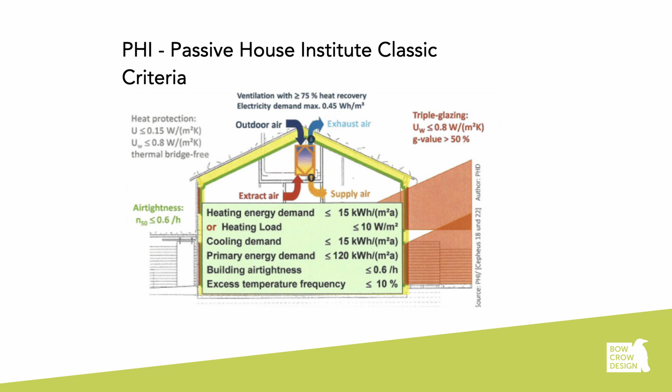So this is what it takes to certify to a PH standard. With PHI, the Passive House Institute, we've seen this slide already. We have certain goals to meet, and they're hard and fast. In order to do a classic certification, it's 15 kilowatt hours per meter squared, or a heating load of 10 watts per meter squared. The cooling demand needs to be reasonable, the primary energy demand needs to be under 120, and the air tightness at 0.6. These are all a really big deal.

In order to get to the certification level: the definition of heating demand is the energy used annually based on the passive house method for calculating floor area and volume, which is not the same way you would normally calculate floor area and volume. The heating load for a passive house is the maximum heating power necessary to keep the internal temperature at 20 degrees Celsius, 24/7, during the winter.

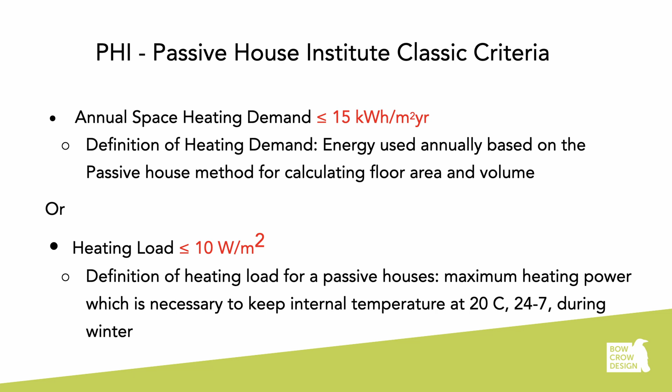The primary energy demand is the total energy to be used for all the domestic applications—all the base loads, all the heating, as well as the hot water, and the building air tightness needs to be 0.6 ACH. Getting to 0.6 seems kind of crazy.

I think the standard for building code in Canada is around 2.5 for a very good building, and probably most older buildings are at 4 or 5. So 0.6 is a very airtight building, and when you're doing that you do have to consider ventilation—it's an important aspect. But when doing an airtight building, getting to 0.6 is the first hurdle; many people who practice this get buildings to 0.1 or 0.3 pretty easily.

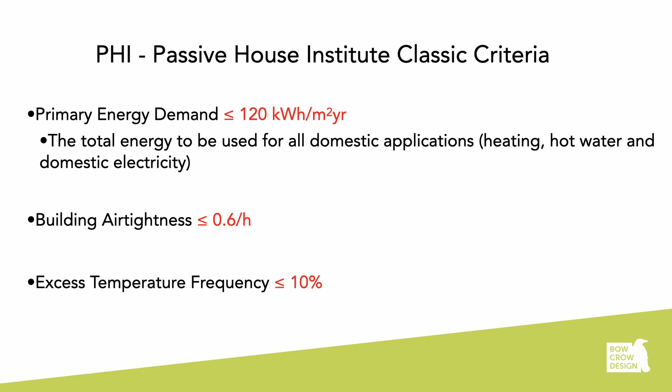We use the Passive House Planning Package, the PHPP, for determining whether a building will meet the criteria for certification. It's really a big spreadsheet with many pages intermingled with each other that help determine whether the building is meeting the criteria.

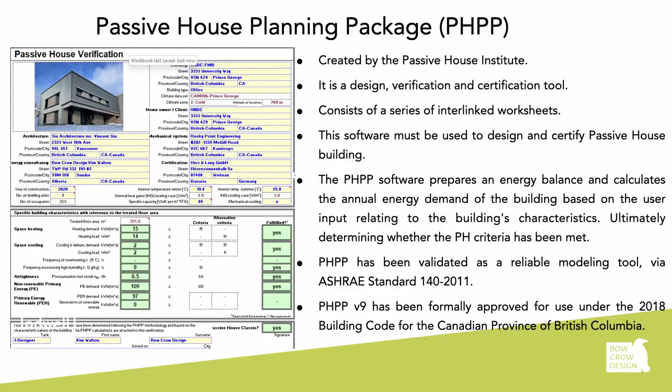This page we're looking at is the verification page. You use the software and move parts around, playing with different aspects of the building to see whether you're making the grade, and everything gets calculated on this front page. We also use another software tied into the PHPP called Design PH, which is a plugin using SketchUp that feeds into the PHPP.

This is a really good and fast way to figure out whether a building is close to being certifiable. We use this sometimes for a building that isn't being certified, just so we know if we're getting close to a certification level.

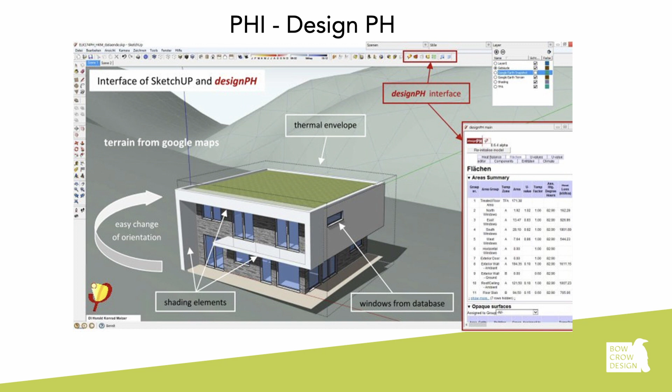The process for certification: the very first thing you need to do is find a certifier and somebody who's going to help you design your building to a certified level. In the design stage review, it's important that those people are involved in all the decision making and all aspects of the design. Otherwise, it's very difficult to get to a certification level.

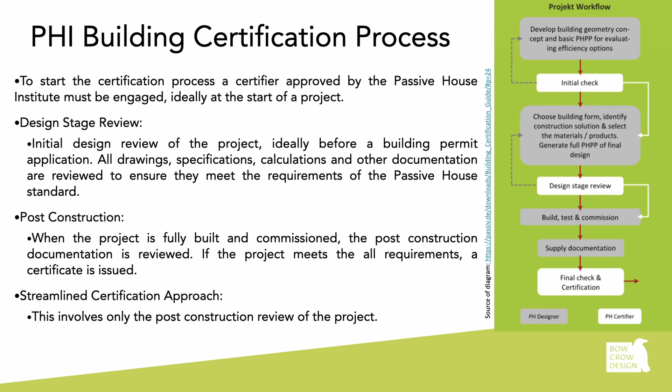Then after construction, when the project's fully built and commissioned, the evidence for all of the work—usually photographs and documentation—is reviewed by PHI in order to get the project certified.

So I'm going to talk about a couple of projects that I've been the certification expert for, or have worked on, that have become certified.

This is in the town of Valemount, which is west of Jasper, in BC, in Zone 7A. It has 5,357 heating degree days. Just incidentally, Winnipeg is about 6,000 heating degree days, so Winnipeg is colder.

But this is in the mountains, and it does have a lot of shading because of the mountains and this location. The architect for this project was Vincent Sin, and the builder was Eric Olofsson Construction.

The plan was to use the Larson truss approach, and I'm so glad we had so many nice photos of Larson trusses. The building was surrounded with insulation, and the air tightness ended up being 0.39 or 0.4.

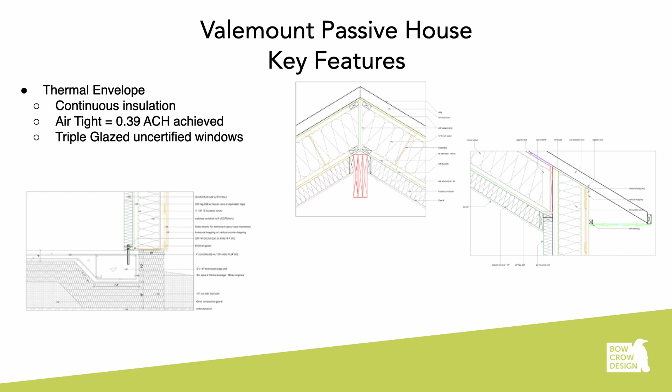We used triple glazed windows that were uncertified in this project, so to make that work we had to do some thermal bridge modeling and over-insulation of the windows. The walls and roof systems for this project were prefabricated by Collective Carpentry.

There's a great picture here showing how, because it's a vaulted ceiling, the ridge beam has been prepped for being air sealed up against the roof deck.

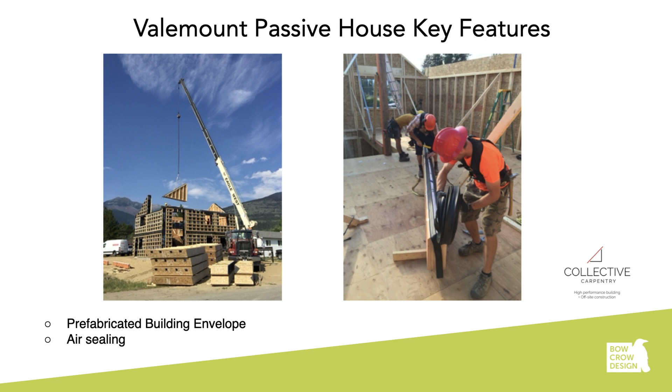We used the Paul Novus—which I don't think exists anymore—and the Comfofond, which is a perimeter glycol loop for preheating the HRV.

We just used an electric tank for the domestic hot water, and this house does not have a heat pump. It's just electric resistance heating throughout.

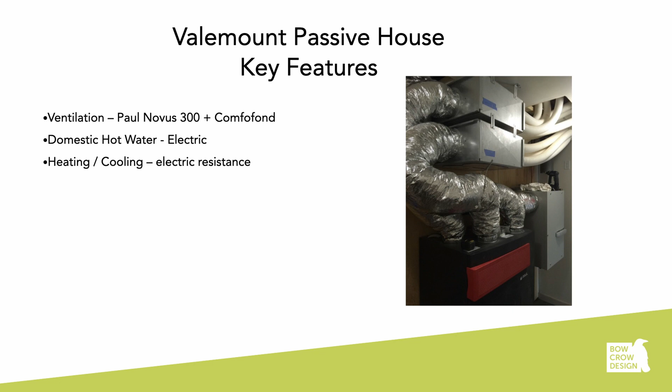When I was brought on, the design was mostly done, but when we ran it through the Passive House Planning Package, we realized we needed a little more solar gain, so we had to add a window on the south side.

Also, to achieve certification, we had to do thermal bridge modeling for all of the connections. You don't always have to do that, but we were just on the edge of certification, so we had to do an awful lot of thermal bridge modeling for this project.

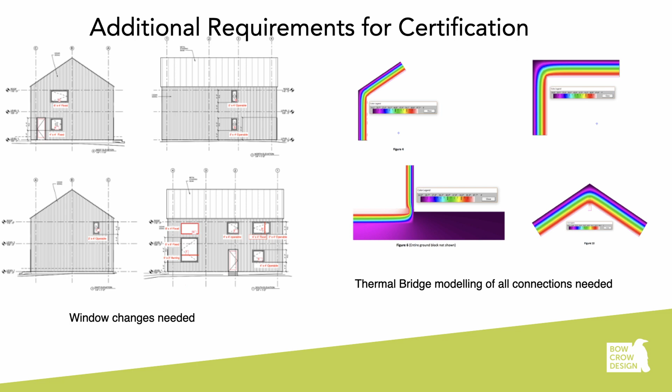But in the end, certification was achieved, and the owner of the building is really happy about the house and about living in it.

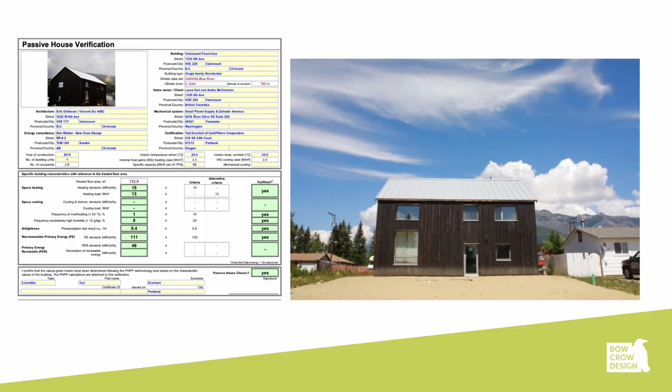His motivation for doing this was that he was the mayor of Valemount at the time, and he wanted to set an example, hoping everybody else in the town would build passive house. That hasn't come to pass yet.

This next project is a small commercial building at UNBC.

It's a facilities management building, designed by Vincent Sin as architect, with Olofsson as the builder. This is at the University of Northern British Columbia in Prince George. The heating degree days still put it in a cold climate, though not as cold as Winnipeg, and it's a two-story office building.

There were some interesting parts of this project, one being the big cantilever used for the second floor. There were a lot of requirements from the owners at UNBC for what they needed, but they were determined to have a passive house building, since UNBC has set a standard for all their new buildings to be passive house certified.

So we used a couple of ComfoAir ERVs for this project, and they are certified for cool climates. It's a cold climate, so using cool climate components means we probably have to do something else to make the building work, since we're not using true cold climate products.

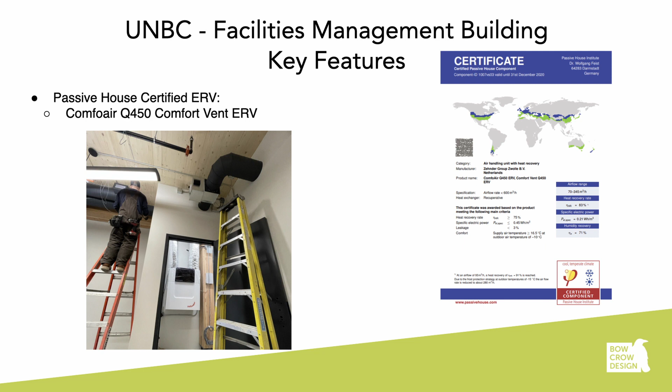Cold climate products, there aren't a lot of them. The reason is there isn't a lot of demand for them. There are a lot of people living in climates that are cool or moderate, and people living in cold climates aren't requiring enough products to make it viable to deliver really good performing products for cold climates. So we end up using cool climate products often.

In this case, we also had windows that were not certified for cold climates, so we had to do a bunch of over-insulation and a lot of thermal bridge modeling in order to use those windows and prove that they worked.

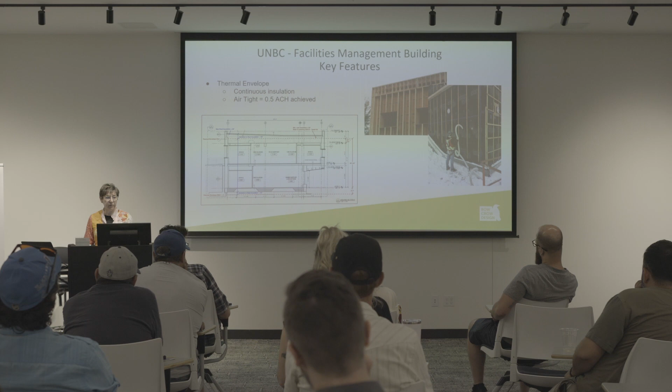This is a really simple shape, a box with a great building envelope, which helps a lot with the project. We had some challenges, not only with the cantilever, where we dropped the framing underneath and filled it with insulation, but also with an existing retaining wall that needed some funky details. But we ended up with an airtightness of 0.5, which is great.

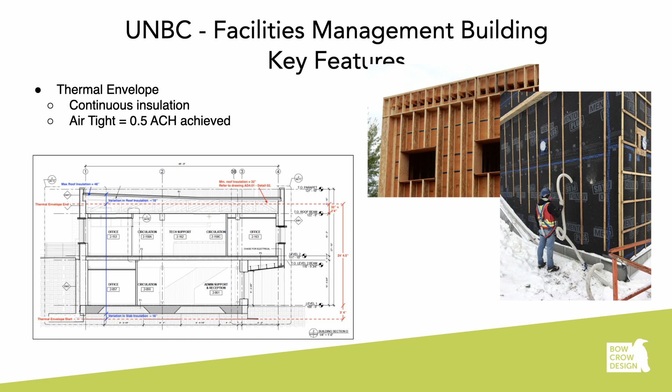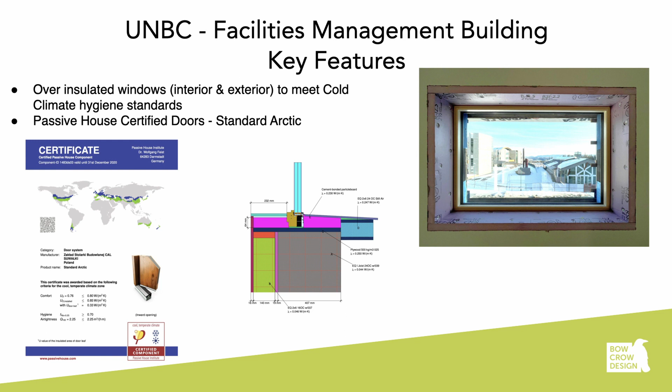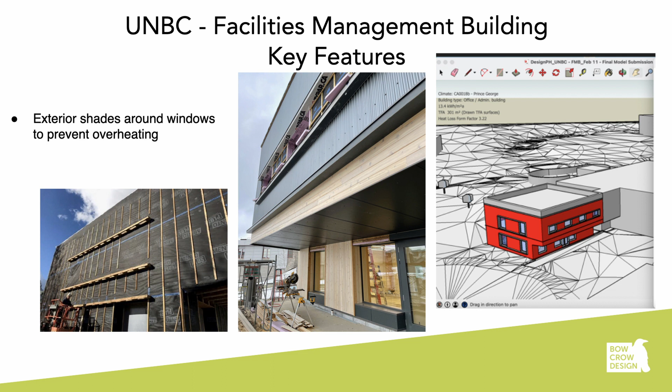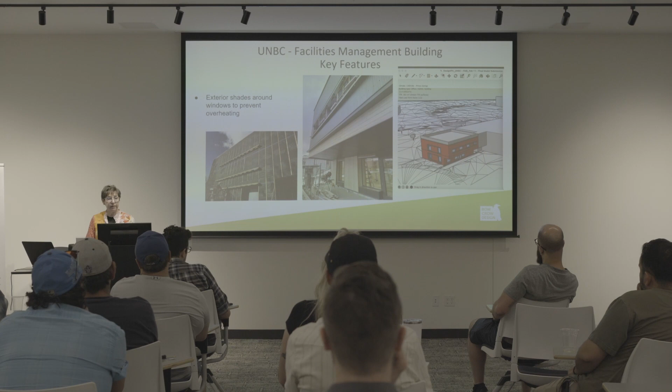Again, we used Design PH at the beginning of this project just to be sure we were on track before we got too far in, and that we were working through the details beforehand.

This project was certified through a certifier. The certifier we used for the first project was a North American certifier, and this one was with a German certifier. Those certifiers work independently of PHI - they are experts in this field, and they help the team understand where they should go with the project.

Okay, now I have about 5 minutes left, I bet.

PHIUS is the US version of PHI, using the same principles, but the PHIUS requirements are climate adjusted. So it's not a hard and fast 15 kilowatt hours per meter squared - it's adjusted for the climate. For this climate, it'll be around 30 kilowatt hours per meter squared, which seems like a lot more, but it's actually not that much different in terms of performance.

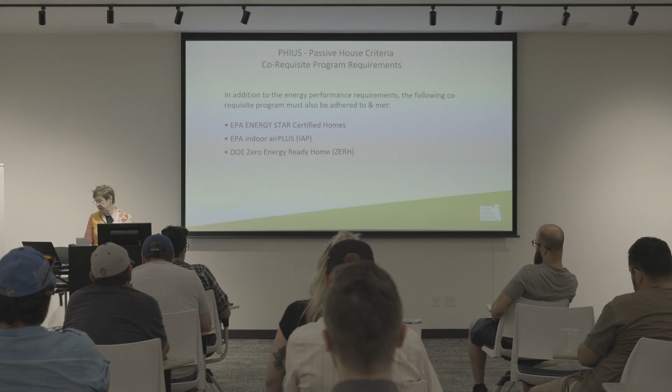The other thing about PHIUS is it's based in the US, so it really depends on Energy Star for certification and the whole system for the DOE Zero Energy Ready Home program, which is established in the US - that makes it a little bit more difficult in Canada for sure.

In this case, what we do is use software called WUFI. WUFI is not the spreadsheet that PHI uses - it's a software developed for hygrothermal performance of buildings, and it has a portal. There's specialized software for doing the PHIUS certification, and once you get through to a certified building, you're able to determine whether there's going to be some moisture or dew point issues, hygrothermal issues.

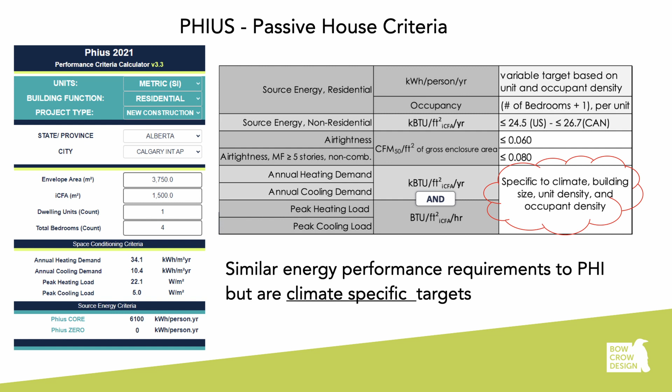We have to have Energy Star certified equipment, and that's turned into an issue because that's an American standard, and the equipment you want or need to use isn't necessarily certified. You'll take a hit in the efficiency PHIUS will accept if it's not certified. It requires all of these things as well.

In the radon mitigation, it does look at some other things that PHI does not look at.

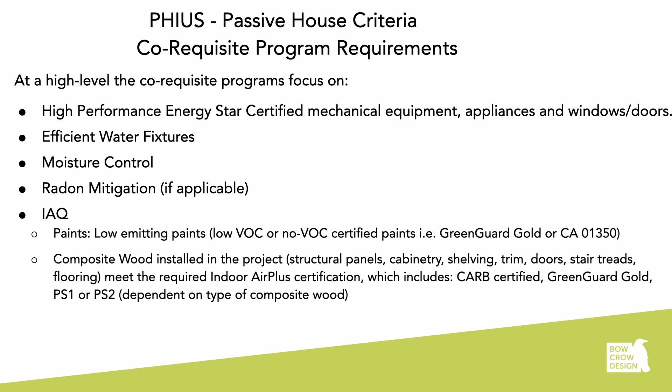This is why the software is called WUFI—is anybody German here who can read that? It's a funny name. It also uses a SketchUp program for doing the basic model, so it's got a plug-in. You can throw a SketchUp model or a Revit model into the software in order to determine the size, volume, and all those things about the building.

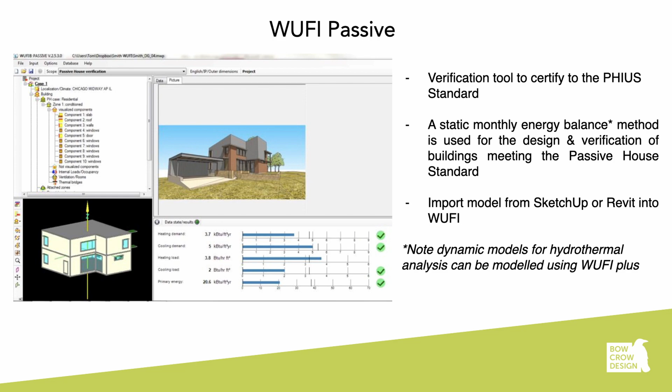So WUFI is kind of like Design PH plus PHPP. How's that for acronyms?

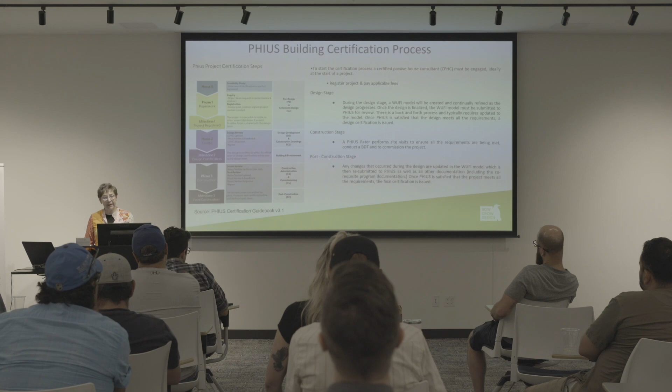Okay, the PHIUS certification process is a little different because the team that looks at the project at PHIUS is actually part of PHIUS, not a separate certifier.

But the parts that are the same: you have to engage a certified passive house designer or consultant at the very beginning, and the teamwork is so important. Working through the WUFI model and making sure you're on track is very important during the design process, with a lot of consultation and planning beforehand.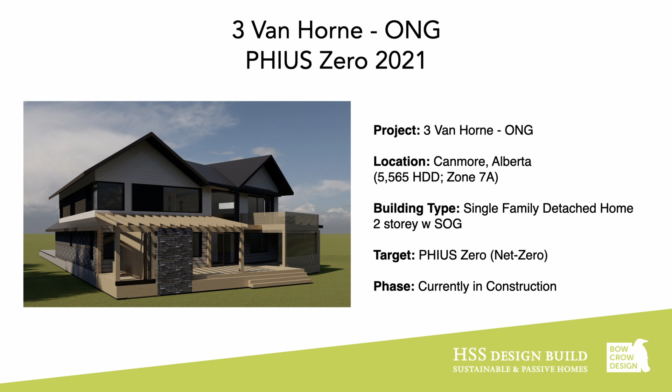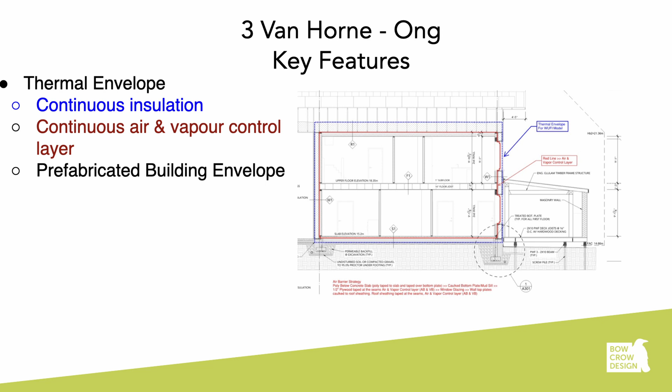What's cool about this building—I've only got two minutes so I'll go fast—is the continuous insulation and continuous vapor control layer, and we did some prefabricated walls. At UNBC we built the walls on site as a Larson Truss project, but in this case they were prefabricated. We plan on over-insulating the windows, and we have exterior shading blinds in this project.

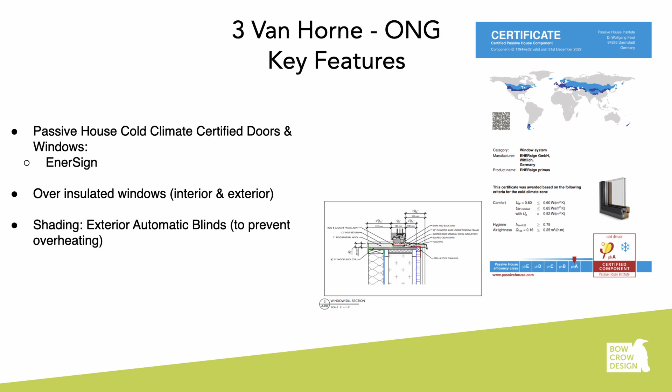But this is the most interesting part of this project, at least I think so. We prefabricated not only the walls but a flat roof system for the building, so it was a complete building envelope installed in 3 days on site—a completely sealed building envelope.

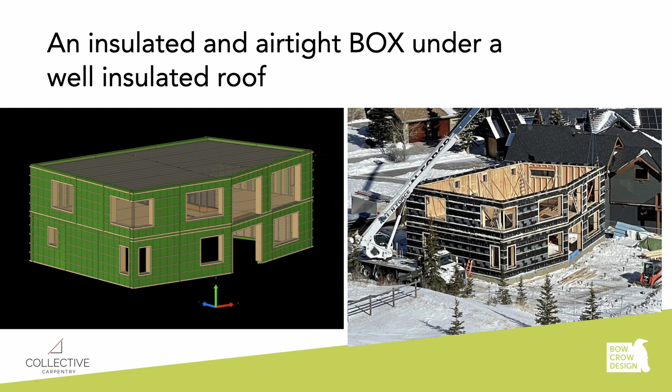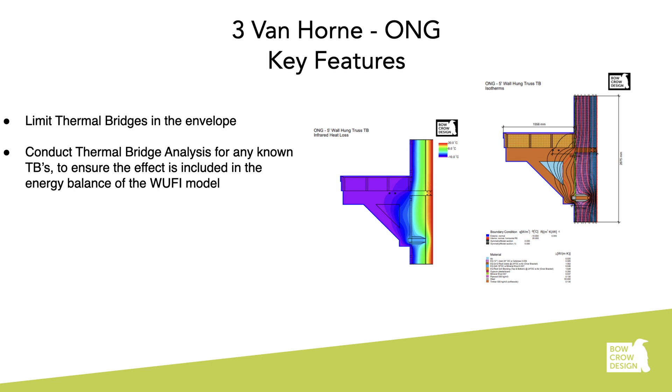We have just one thermal bridge we had to calculate for, related to some overhangs on the front of the building. This is what it'll look like later—we built the thermal insulated box, then added a great roof on top with a lot of insulation on top of that.

I know I have about 30 seconds. We've heard this already, but it can't be spoken of too many times: in order to build good buildings, you have to assemble a team from the beginning, and the owner has to be on board and understand the goals of the project.

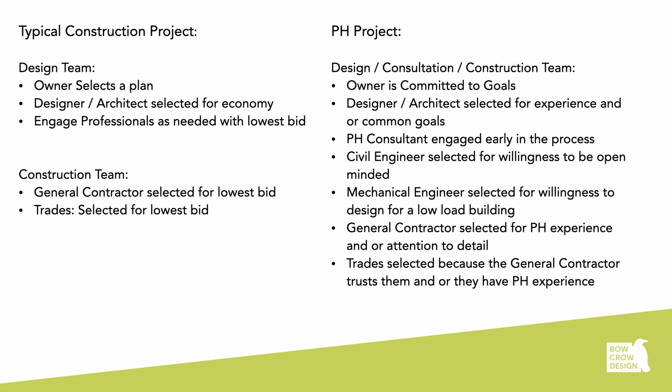It's really a big deal that the team works together, and that you hire a consultant—whether a passive house consultant or, for something that might not be certified, a certified energy analyst—to be sure you're on target for what you're trying to do with your project. It's not a siloed system. An unsiloed system is the way to get a better building, meaning everybody's working toward the same goals.

And that is the end, because my time is up.